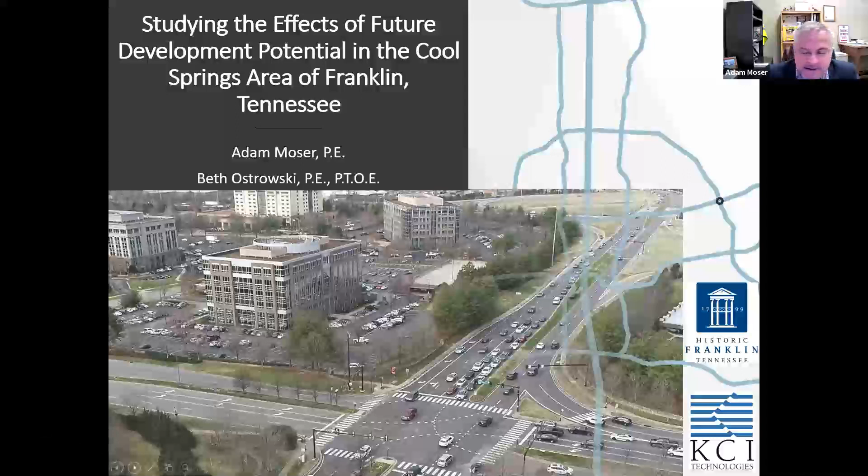So a little bit about Franklin for maybe some of the DSITE people that are on that maybe have never visited us. We are the 10th oldest city in Tennessee. We're actually older than Nashville, and even though people think we're a suburb of Nashville, we like to kind of think it's the other way around because we were here before they were. But no, we like to keep our small size. It's actually a constant citizen resident request. You know, we're growing too fast, we're doing this, that. So our board does hear that quite a bit.

But at any rate, as you can see, our population has kind of exploded in the last 10 years. Lots of new retail office space, jobs have increased, obviously, with all the new development that we have. And in particular, the Cool Springs area, which this study is about, that's kind of our main business or commerce area that most of the people are working at or going to, at least in Franklin. So next slide.

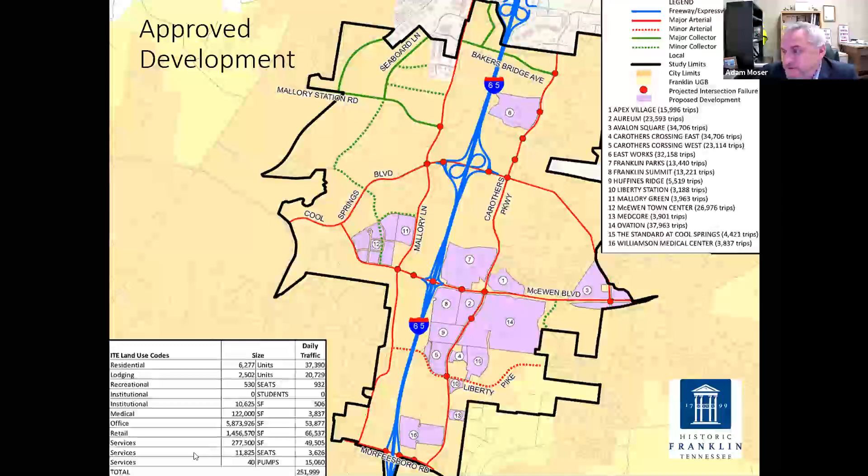So that's the reason why we decided, hey, let's go ahead and study this. Let's see what we need to do. Maybe there's some policy decisions. Maybe there's some infrastructure decisions to be made, and whatnot. So the next slide, I'm going to hand this off to Beth, and she's going to talk about the meat of the study and what they did, and I'll come back in the end and give you a wrap up of what the board said and what we've implemented and what we're going to implement. So go ahead, Beth.

Thanks, Adam. So we jumped into this study tasked with inventorying and analyzing existing conditions, evaluating the impacts to the transportation network based on multiple future scenarios, and recommending improvements to operations, infrastructure, and policy. The study area, Adam's kind of gone over this, but with 64 intersections, I like this graphic that just identifies our major roadways pretty clearly. Next slide, please.

So we began with data collection in January of 2020. Luckily, we had everything done before COVID hit, so we lucked up there. One highlight related to data collection was the drone footage, which we used to validate our peak hour observations and model. With the quantity of intersections and this being a very large study area, the drone footage proved very valuable as we refined our existing model. And these are all stills from that drone footage.

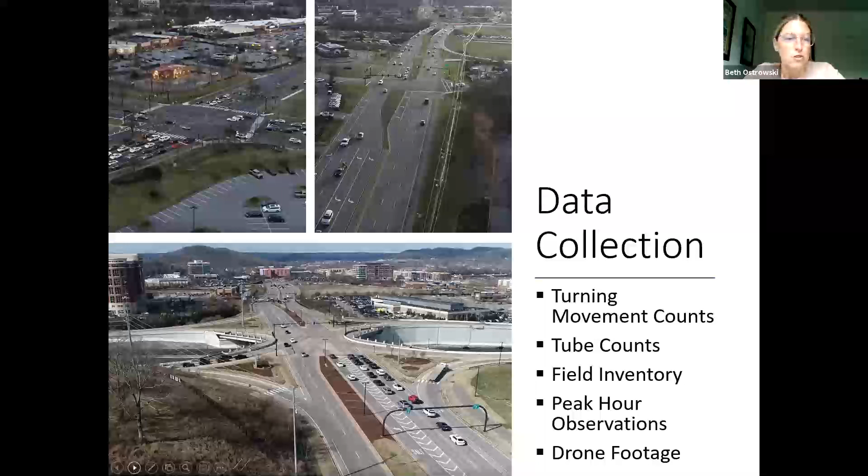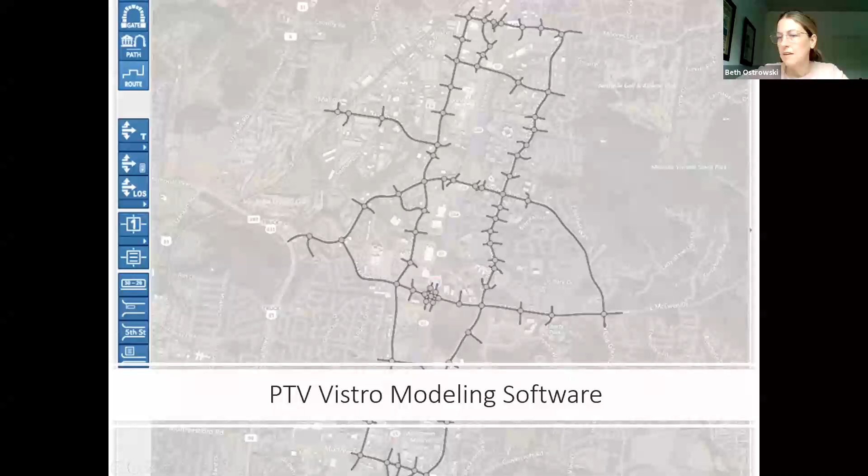Next slide, please. So we had recommended to the city using PTV Vistro instead of Synchro, which I think is what most people might expect. And before I jump into the why, let's use Menti to conduct another quick survey. Luke, if you go to the next slide and pull up that Menti question. So are you familiar with PTV Vistro? Do you use it? Choices: yes, often; yes, occasionally; heard of it but haven't used it; and not familiar. And I'm gonna go ahead and answer as well.

We'll give it just a second, but good information on what I need to tell y'all on this next slide. Luke, I think that's probably a good subset there.

So PTV Vistro does look a lot like Synchro. It feels a lot like Synchro, particularly the latest iterations of Synchro, where you can have multiple scenarios in one file and where you can do your distribution via paths. In my opinion, it's a superior product to Synchro for this particular type of study, and I'll give you just a couple identifiers there. One, in terms of the quantifiable results, we much prefer the HCM6 analysis in PTV Vistro

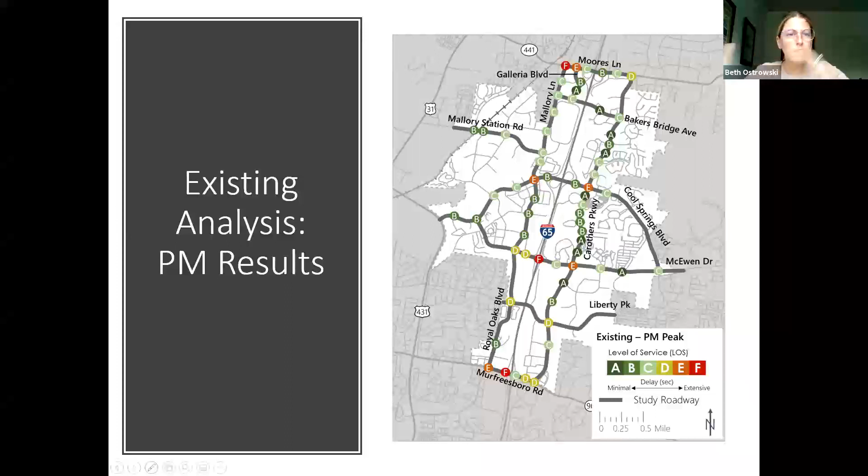Next slide, please. We looked at two categories of future scenarios. The first category was approved development, which we considered at 50% and 100% build out. And then we had maximized development scenarios. Ultimately, we analyzed these 3 times at 25%, 50%, and 100%. More on that and the maximized development just in a little bit here.

Next slide. So we began with background growth, which we considered by corridor, not system-wide. Growth rates, just for information, landed between 1% and 2% for all corridors, so 1, 1.5, or 2%. We used 3 different methods to validate our background growth. First, we compared historic turning movement count data. The city had an abundant collection of historic turning movement counts that we could analyze and look at year-over-year growth.

Second, we pulled TDOT's AADT tube data and did that comparison that I think every traffic engineer across the state of Tennessee uses. And third, we used StreetLight to pull historic volumes via mobile device tracking. I probably should have had another Menti question about StreetLight, but if we have questions about that in Q&A, I can answer those. I'm sure StreetLight has pitched to most people on this call at this point.

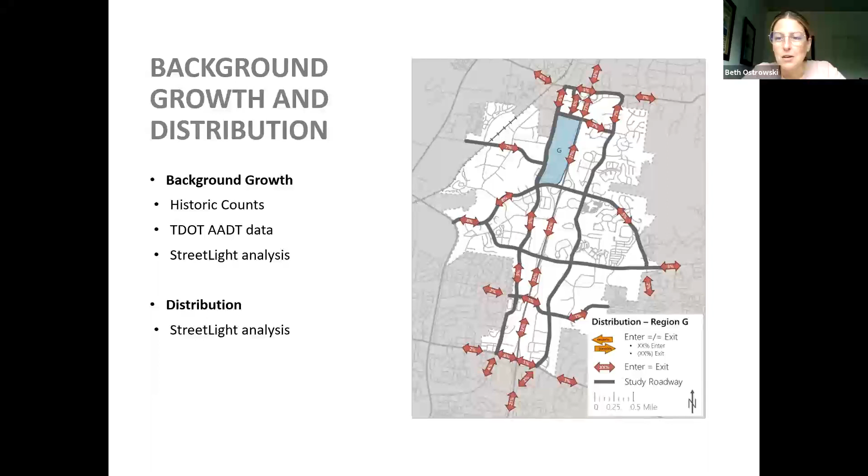We also use StreetLight to determine distribution for regions that we created across the study area. These regions and distribution were used to extend approved traffic impact study distributions outside their individual study areas. And we also used this, what I'll call macro distribution, in the maximized development scenario, which I'll describe shortly.

Next slide. So Adam touched on this a bit earlier, but we had 16 approved developments and their associated recommendations added to our model. As I mentioned, we modeled each of these developments in Vistro and extended the distribution paths beyond their own study limits to our study limits. So let's look at the results for the approved developments.

Next slide. At 50% build of the 16 approved developments, and these are grown to 2030, operations generally still look pretty acceptable. 31% of intersections are anticipated to operate at unacceptable levels of service, according to City of Franklin standards in the PM peak.

This is an opportunity to explain why I am an advocate for this type of study. When conducting a basic traffic impact study, we may include a few background developments, particularly ones that are really in the project vicinity. But there are likely, especially in a high growth area, other future developments outside the immediate project vicinity. I believe the best way to track these developments and the actual needs of the transportation network is via what I describe as a living model.

So I'll step off my soapbox for a second here on this one, but you'll see on the next slide kind of the importance of understanding the bigger picture. You can go to that next slide. Oh, we're there. Thank you.

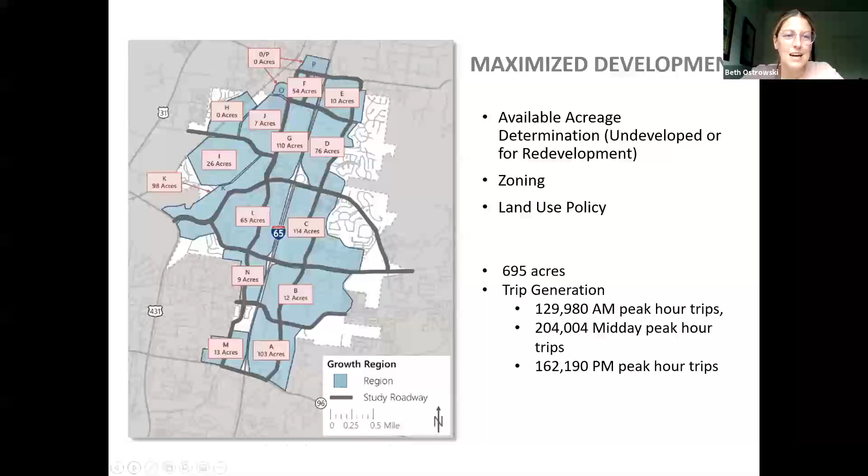So we wanted to anonymize this data rather than call out specific parcels. We didn't want a report that said, hey, everybody go buy this land. So we utilized the regions that I discussed earlier, and this allowed us also to distribute trips from each of these regions throughout the network. We looked at zoning and land use policy to determine, for example, an allowable building height within each region, and anticipated uses per the land use policy for each region. This allowed us to complete a trip generation and eventually assign trips to each of these regions.

So let's click ahead to the results here, Luke. At 25% of the maximized development scenario, we are failing in most places during all times of day. And I think it's worth noting here that we haven't incorporated any improvements yet. So this is just with the existing road network and already programmed infrastructure improvements. And then the next one, 50% looks probably just like everyone predicted based on the numbers we had looked at. And let's click ahead to the next one.

So at 100%, I described our model as broken. Do not get me wrong here, PTV Vistro worked, but the delays and the queues were so monstrous that the results were really laughable and not worth reporting. We actually went back and added the 25% scenario after the fact when we realized this 100% scenario looked so similar to the 50%, just a worse version of it, because we wanted to have two scenarios that produced varying results that were worth reporting.

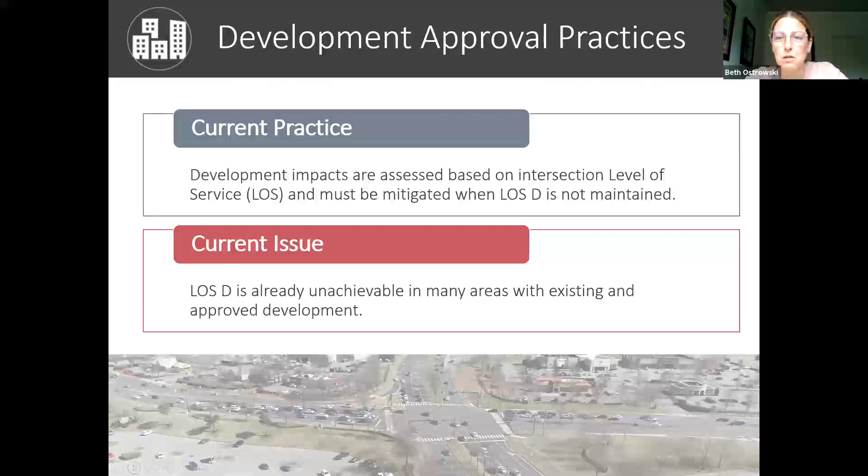We partnered with the city really closely to develop these recommendations and made a lot of refinements just to make sure that we were proposing something the city was comfortable with and really could move forward. Next slide, please. So jumping right into development approval practices, the city currently assesses the impact of developments using intersection level of service, and those impacts must be mitigated when level of service D is not maintained. However, we know there are many locations where level of service D is already unachievable. The photo at the bottom of this slide is one example where this occurs at the intersection of Cool Springs Boulevard and Mallory Lane. Next slide.

When we look at this intersection, and this is Vistro here, we see that it would take 11 extra lanes identified in red on the right to get this intersection to a level of service D. These improvements are likely physically and fiscally infeasible. So what's the answer? Next slide. Actually, let me say one more thing on that previous slide. That was if you look at this comparison, and just because I know I'm basically not giving you any infrastructure recommendations.

This is what a lot of the intersections look like. Basically any point where a couple arterials were crossing, this or more is the level of improvement needed. So this isn't a one-off situation. Every intersection basically needed at least a lane or two, and many needed 5 or 10 or more additional lanes in order to get to level of service D.

All right, you can skip ahead. Thanks, Luke.

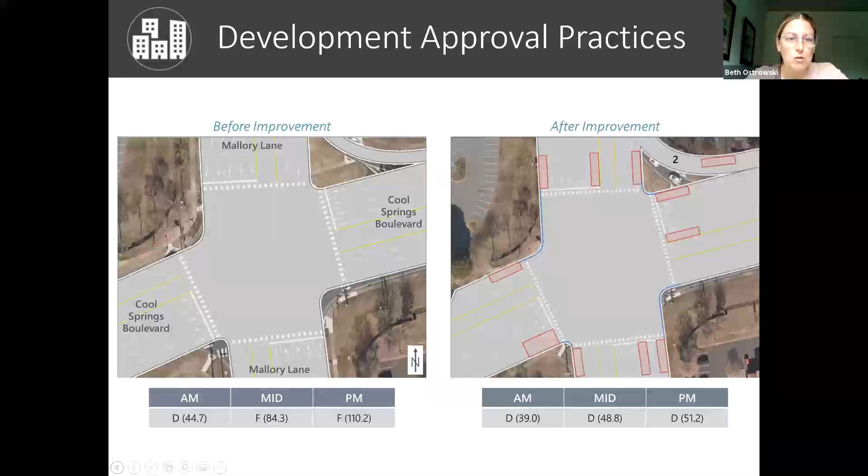So we proposed that a target level of service still be maintained in the city's street standards, knowing that level of service D isn't always achievable, and simply mitigating impacts with traditional infrastructure improvements as best as you can. So the city is already moving forward with this recommendation, moving instead to level of service E as a threshold, which I think is a great first step. In addition, we recommended the city begin using alternative metrics such as VMT, vehicle miles traveled, to look at impacts and applicable solutions more broadly.

So let's look at an example of that really quickly. Let's say the city has a new large mixed-use development coming to Cool Springs. It'd be a great addition to the local economy, but all of the surrounding intersections are failing with existing level of service. We know the development will increase the number of vehicles on the road and make level of service, delay, and queues worse, but there's no feasible infrastructure improvement that would fix it. We can't pave our way out of the problem.

So the question becomes, how do we make sure impacts are mitigated as much as possible? In situations like this, we advocated that the city look at the vehicle miles traveled of the development, or VMT, which takes into account the surrounding land use, multimodal facilities, and trip characteristics. Typically we think about how many trips are generated by a development, but what if we knew that this site would have a regional employment draw, necessitating long commute lengths from common destinations? It may change our feelings a little bit.

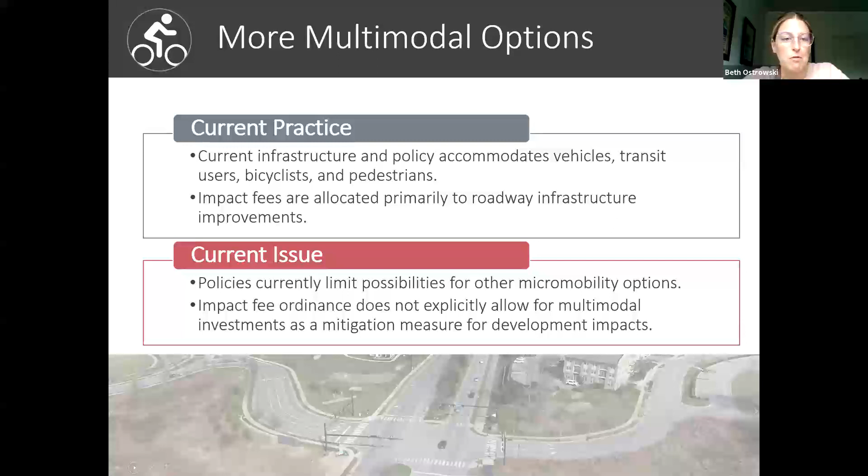We recommended a few things in this area. First, there is real potential for micromobility options to succeed in Cool Springs and fill a niche mobility need, so we recommended the city use a pilot project to test this. Adam will talk in a minute about the board's temperature on that, but it was one of our recommendations. We also recommended the city reevaluate its roadway cross section to safely and efficiently accommodate various forms of travel, and explore the need for additional multimodal fees.

Ultimately, our recommendations included an implementation timeframe for policy recommendations, with tandem infrastructure recommendations. We viewed these as a buffet. While we hope the city will take everything from the buffet and implement many of them, we recognize there may be a few things that aren't their option of choice, and they don't need every strategy or everything on the buffet to be successful—but they do need to take some things off the buffet to move the city into the future successfully.

With that, Adam, I'll turn it back to you to bring it home.

As you can imagine, the study lasted pretty much through COVID. We started before COVID and had four presentations to the board from March, April through November of 2020, going through what Beth just covered step by step. In the end, when you're not in front of the board in person—remote Zoom meetings—sometimes you don't get quite as much feedback, so that may have helped or hindered our progress.

Roundabout evolution in the US started with single lane roundabouts, which were very successful. We know not everybody likes them, but after implementing, they're always successful. These are very nice to use in urban areas, rural areas, near schools, or wherever. Lots of communities have already embraced single lane roundabouts, and you can see them popping up everywhere, sometimes with bypasses.

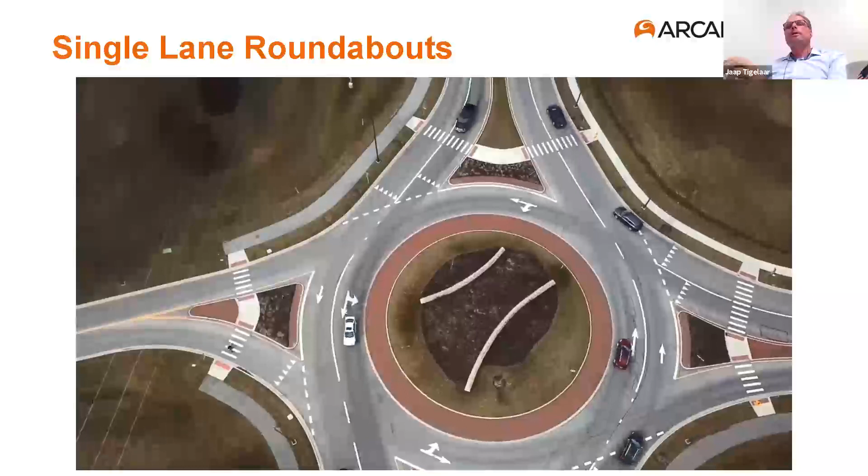Once we got comfortable with single lane roundabouts, we blew them up and did multi-lane roundabouts. These first started with multiple lanes on the main road and single lanes on the side roads, then grew into multi-lanes with all directions, 2x2s and even 3x3s sometimes.

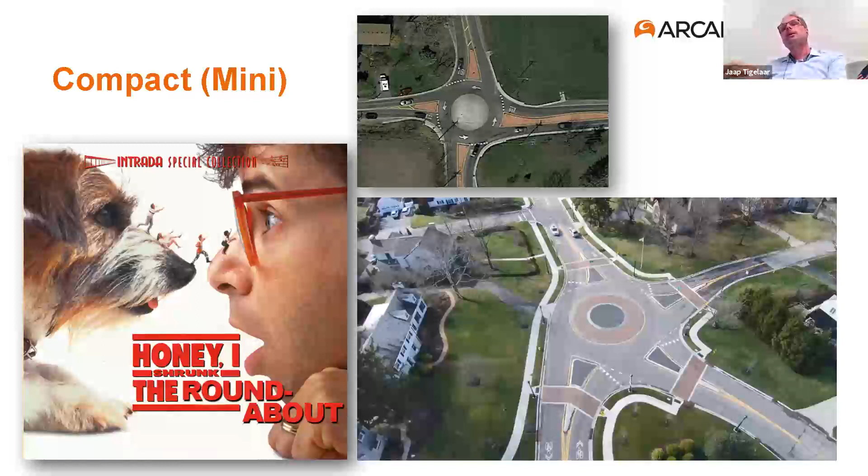After we blew them up, we decided to shrink them as well, and now we have the comfort of mini roundabouts, the smaller ones. This is much smaller than single lane roundabouts, about 90 feet in diameter. Many use this on low speed approaches, and several communities are also starting to use them successfully on higher speed approaches.

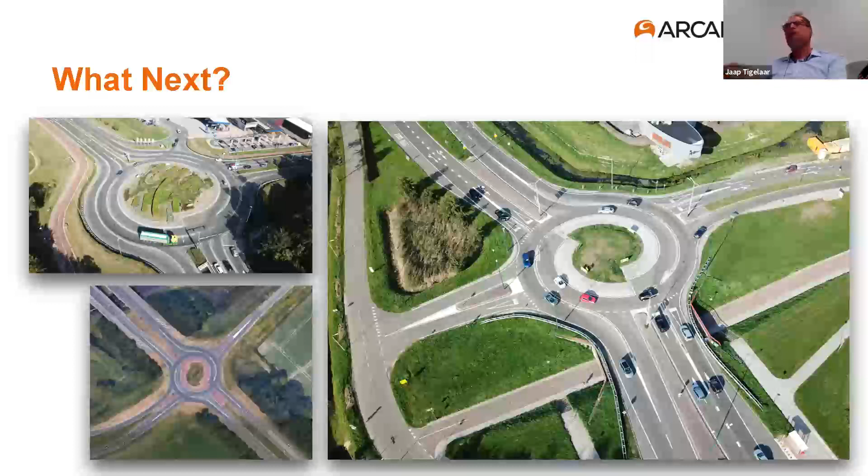But the question is, what is next? So we think the turbo roundabout could be the new tool in the toolbox for multi-lane roundabouts. In this presentation, I will provide background information and history, and look into how we can implement them in the US. A typical copy-paste from the Netherlands, using images like these in the US, might not be the best solution, so we need to adjust them a little bit.

So why turbo roundabouts in general? This is an important question, because if we cannot answer it, nobody will accept it. In the Netherlands, we introduced single lane roundabouts already in the 80s, so we've experienced 30 or 40 years of single lane roundabouts. They were really successful, but when traffic volumes increased, very similar to the US, in the early 90s multi-lane roundabouts became popular in the Netherlands.

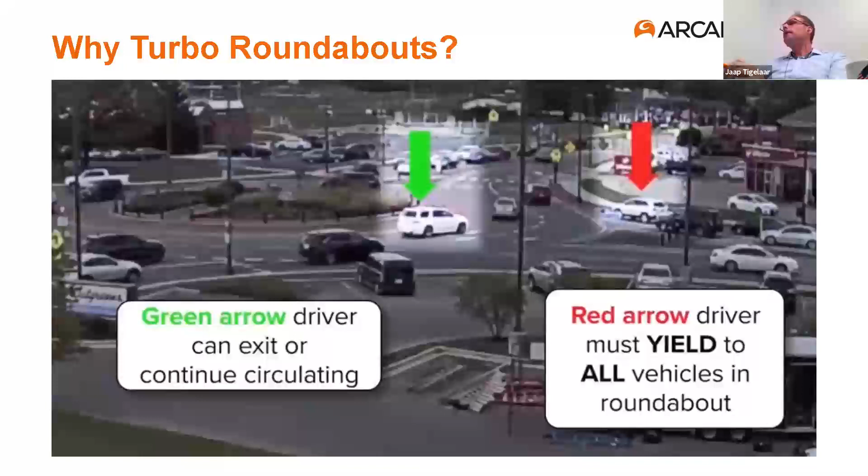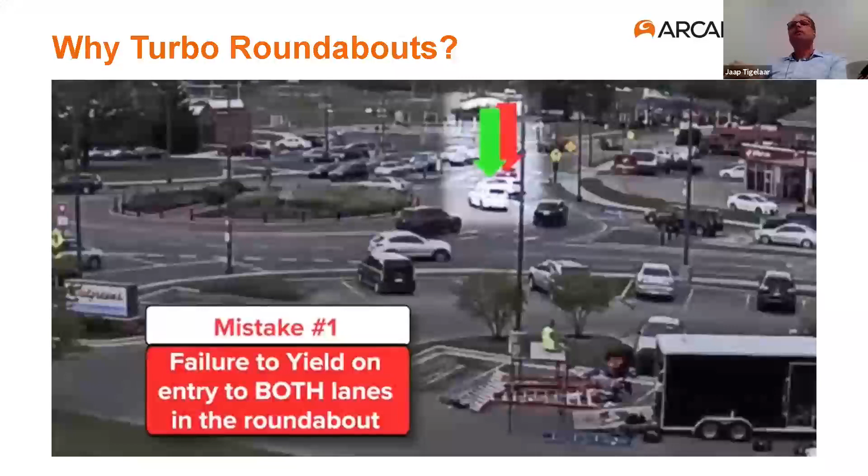This is also shown in this movie. Here's a good video from the city of Hilliard in Columbus, Ohio, that shows the potential problems with 2x2 roundabouts. The green arrow driver on the left is approaching the double lane roundabout, and this is the first problem that sometimes happens: the red car failed to yield for both lanes in the roundabout. As the movie continues, those two cars end up side by side, creating a crash when the green car wants to exit the roundabout, because the red car didn't yield.

The red car was on the outside lane wanting to make a left turn, and used the outside lane instead of the inside lane. So these are two mistakes often made on multi-lane roundabouts that a turbo roundabout can solve.

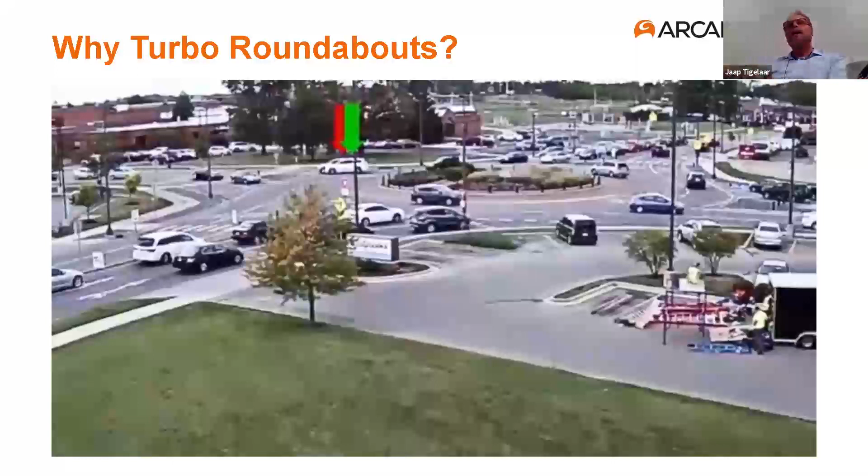So what kind of design challenges have we experienced in the Netherlands? Basically, what we wanted to do with the turbo design was create a layout that eliminates those safety conflicts we saw in the movie, while still increasing capacity. This resulted in a spiral-shaped roundabout, the turbo roundabout, without lane changing on the roundabout itself.

So why the name turbo roundabout? Well, it's not because you can have high speeds on it, since we normally design them for speeds like 20 to 25 miles per hour. It refers instead to the improved traffic flow compared to a standard multi-lane roundabout.

So what is a turbo roundabout, and how is it different from the roundabouts we normally design in the US? There are four main concepts in the turbo roundabout. First, there are no lane changes within the turbo roundabout itself, which eliminates the conflicts we showed in the movie earlier.

This is accomplished by a small raised curb between the lanes. I'll show you some examples later in the presentation. With this curb in place, drivers are forced to make all lane choices upstream of the roundabout before entering. Another very unique feature is the spiral geometry. Think of the turbo roundabout as two semicircles that are slightly offset, which naturally spirals the inside lanes to the outside lanes of the roundabout. We'll cover that detail a bit later.

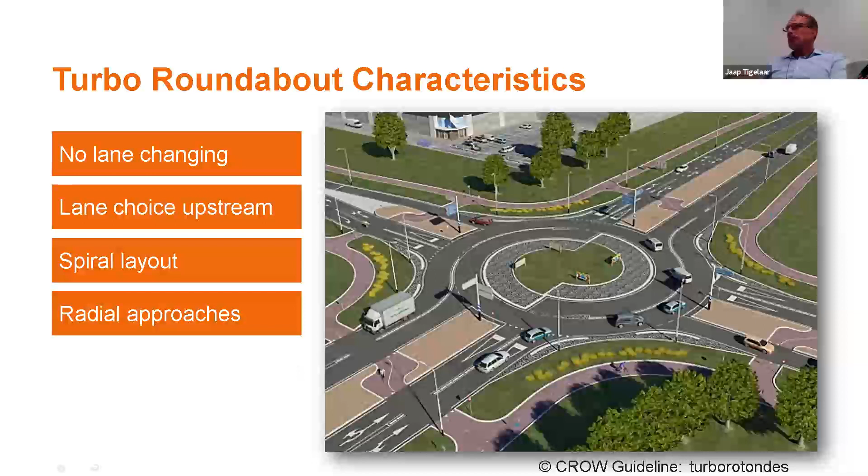A big answer on the question why turbo roundabout is traffic safety. The safety benefit can be explained by the number of conflict points at the roundabout itself. A conventional 2-lane roundabout has 16 conflict points, as shown in the image. That is 12 actual conflict points, 2 weaving points, and 2 cutting points.

The turbo roundabout only has 10 points. And now the weaving points and the cutting conflicts are not there anymore. So 16 versus 10, that is a reduction of 37.5%. That is the theoretical approach, but the safety benefit is also proven in an evaluation study done by a student at the Windesheim University in the Netherlands in 2016.

Christiaan Vos looked at the crashes at intersections 3 years before and 3 years after that intersection was transformed to a turbo roundabout. This evaluation resulted. This evaluated locations where a multi-lane roundabout was transformed. We looked at the injury crashes 3 years before and 3 years after.

And you can see in the table that compared the unsignalized and the signalized intersections to the turbo, and it showed the similar advantage for a turbo roundabout compared to what you would expect for introducing a roundabout at an unsignalized or signalized intersection.

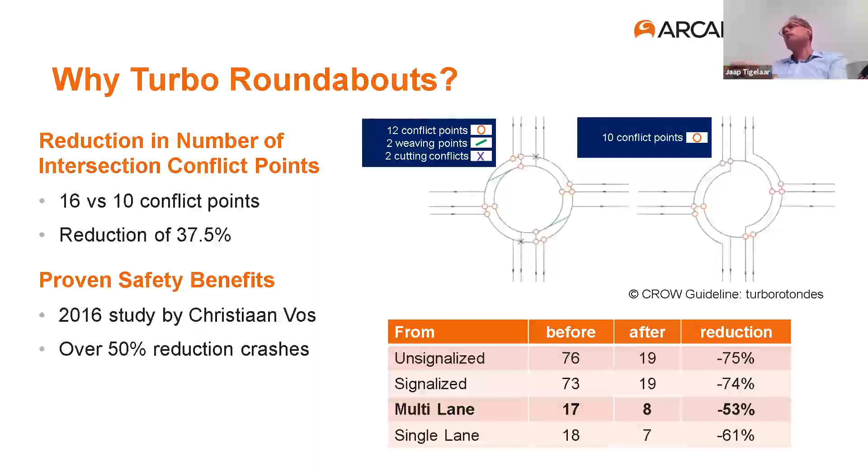But this is a reduction because we normally had a capacity issue at single lane locations. That's why we transformed them to multi-lane turbo roundabouts, and you could still see a reduction in crashes. That's the answer on why the turbo roundabout.

Nowadays we have over 385 turbo roundabouts already in the Netherlands, and over 250 roundabouts outside the Netherlands, mostly Eastern Europe, and at this moment not really turbo roundabouts in the US, but hopefully that will change.

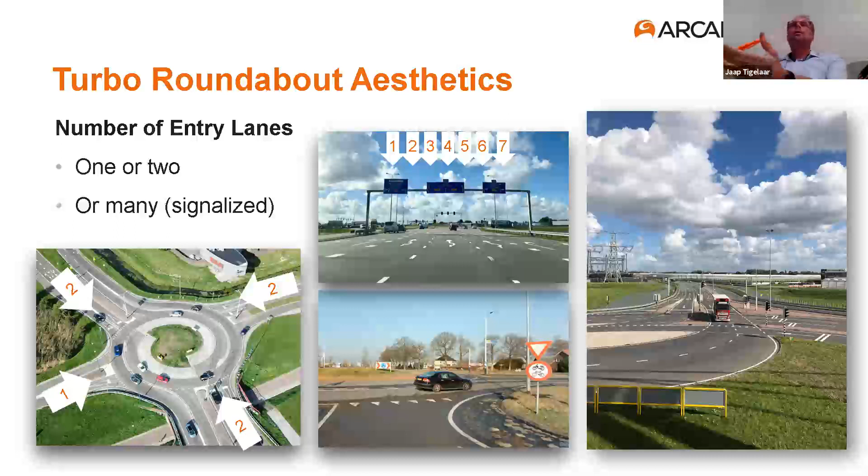We will show them later, but those are a little bit more difficult to design and maybe not the best way to start. The one you see on the left is a normal shaped turbo roundabout with 1 or 2 entry lanes. On the exit lanes, you can also vary in number of lanes. On the left side, you see a roundabout with 2 exit lanes on all exits. On the right side, you see a main road with 2 exit lanes and a side road with just single exit lanes.

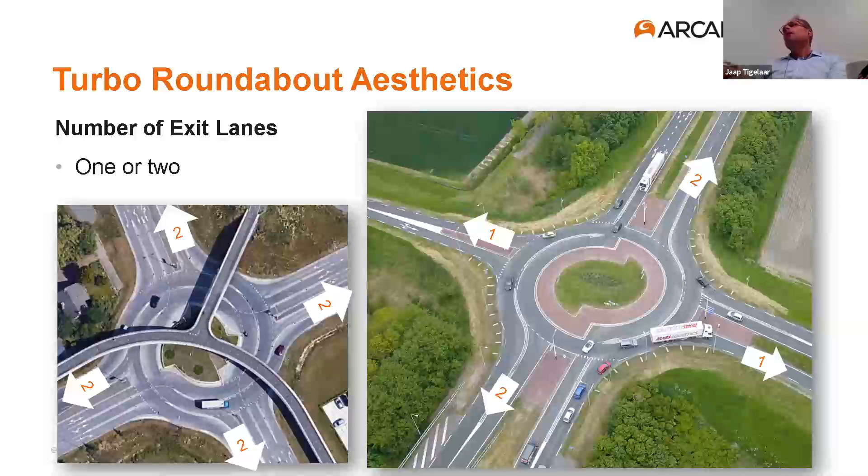When you approach the roundabout, you just have to yield, you jump into the inside lane, and you will be guided through the roundabout to your exit. You blink on your exit and you're guided to the exit without any conflict at the roundabout itself. It's easy. When you're used to it, you can drive every turbo roundabout. So that was the first sneak preview of the turbo roundabout.

Let's dig into some more design elements. All design elements and criteria are incorporated in the Dutch national guidelines for turbo roundabouts. That's the CROW publication 257, based on Fortuijn's design principles. It's all written down in this document, but of course this is in Dutch, so not really easy to read over here. So I will just show some of the images and design elements explained in that document.

As mentioned, the spiral geometry is a key element of the turbo roundabout. Fortuijn created a smooth spiraled vehicle path by shifting the centers of a 2-lane roundabout by just a lane. The inside lane then aligns to the outside lane, and by rotating the whole, the approaches can connect at a right radial angle.

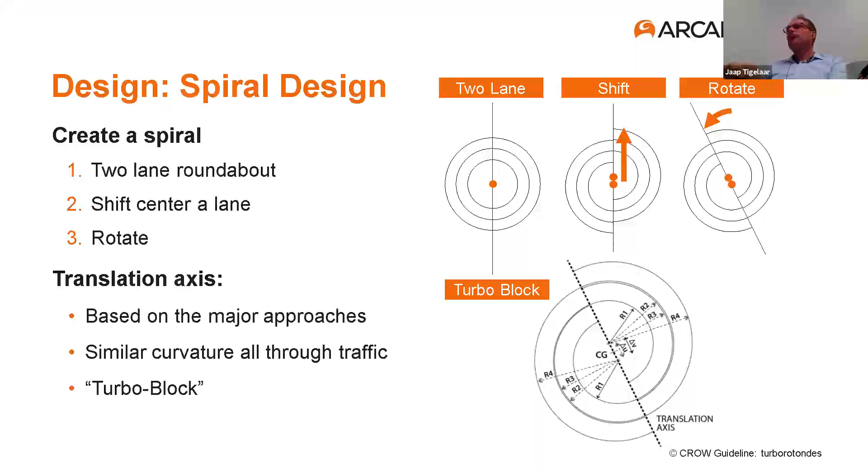This idea looks easy, but for the actual design, the translation axis should be aligned perfectly to the major approaches to create a similar curvature for all through traffic at the roundabout. This basic shape is called the turbo block, and later in the presentation, I also have a turbo block for a US design. We will look into that later.

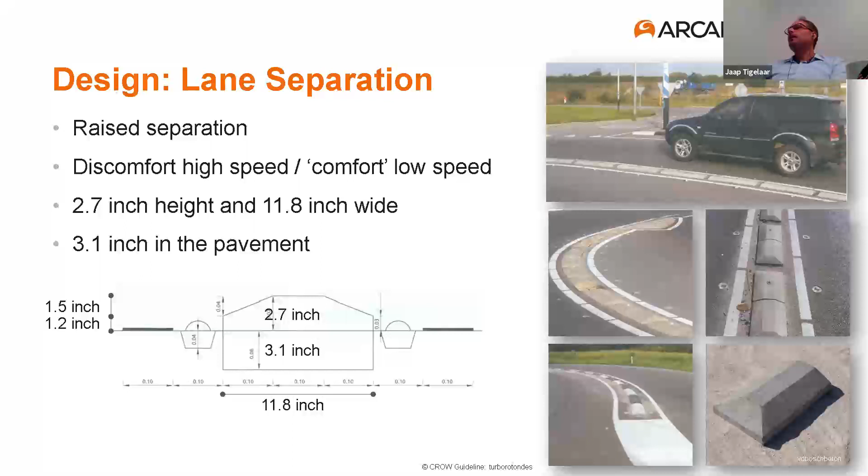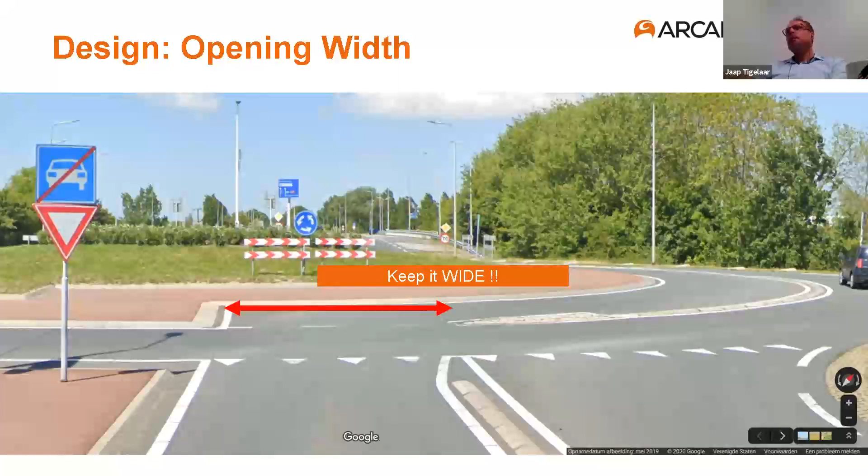Another important feature for the turbo roundabout is the opening width. That's the location where the lane separation starts, and it is crucial in a good roundabout design. The opening width should suit the situation well. We want to keep the opening width as wide as possible, so most vehicles don't negotiate the curb and can comfortably enter the inside lane, from the inside lane to the inside lane.

But we want to keep it as narrow as possible so that it only accommodates the recommended move from the inside lane. So we don't want to invite vehicles from the outside lane to jump into the inside circulatory lane. So that is a bit of a struggle. Keep it as wide as possible, but also keep it as narrow as possible. And that's when we decided to design a special feature we call the droplet, and sometimes it's also called the frog.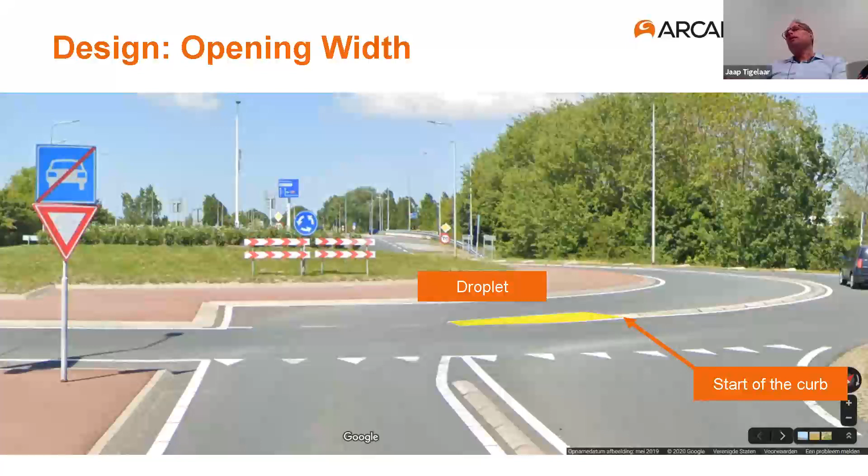This area is to extend the start of the mountable curb, the inside curb. When you are in the outside lane, you don't want to cross it. So you are guided to the outer circulatory lane. But the swept path of larger and oversized trucks from the outside lane can easily enter the inner lane by overriding the droplet. And this is how it looks in more detail.

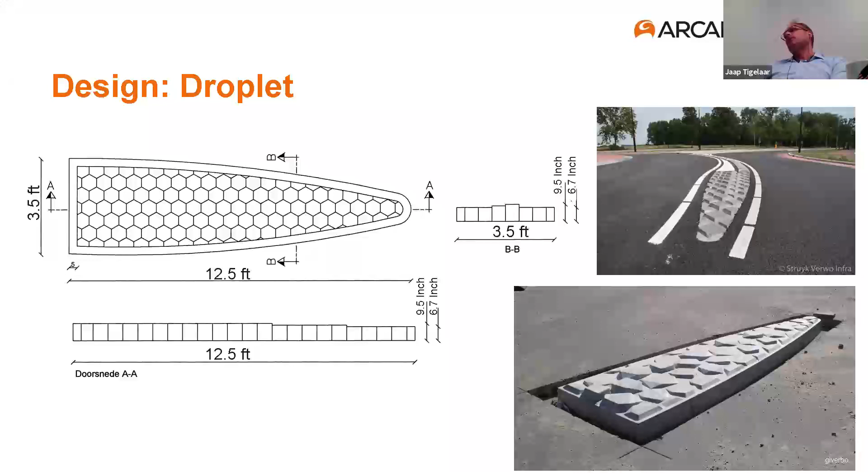It's just a little bit lower than the elevated raised lane separation, but it's much wider to make people more aware of it. It calls the attention to the lane divider and prevents circulatory traffic from changing the lanes. We designed the droplet as prefab concrete segments that we sank into the pavement, so it's easy to develop and to build.

On the roundabout itself, technically it's not necessary to have arrows on the pavement, because when you are in your lane, you cannot change lanes anymore, you can only exit. But some road authorities are just adding additional pavement markings on the roundabout itself just to accent the movements. And at the exit, we put destination signs to show which direction you can get if you exit the roundabout at that location.

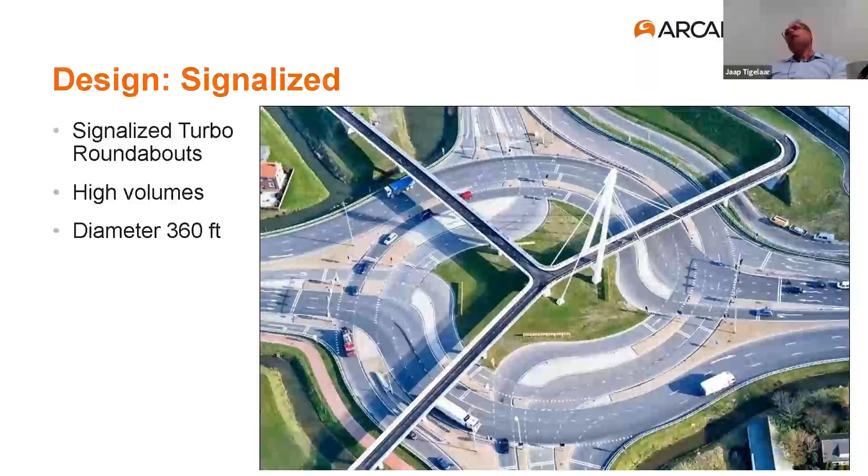At locations with really high traffic volumes, we introduce the signalized turbo roundabouts. These have the same basic turbo features, so it's spiraled, it has a radial approach, you cannot change lanes at the roundabout, so you have to make your lane decision upstream, and no switching between directions at the roundabout. Note, these are really bigger. These are specific for high volume intersections, with a diameter of about 360 feet and way bigger than the normal turbo roundabouts, but can also have high volumes. And volume-wise, we dig into that later.

As said, at high volume intersections, we also produce nice bicycle bridges, but that's something maybe a step too far for the US at this moment.

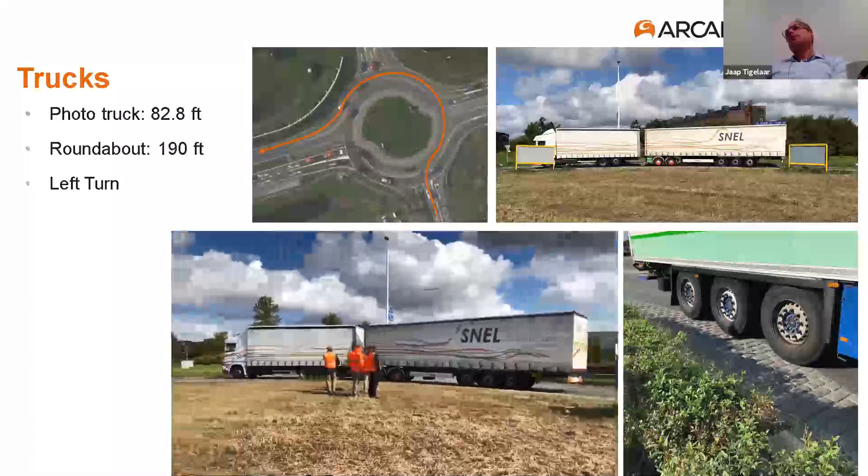For trucks, it's also important that they can make the turns. On this video, you can see a truck of about 82.8 feet. A big truck. It's taking the roundabout that has a diameter of about 190 feet, and it's making a left turn. And as you can see, it's using the roundabout without touching any of the raised elements or the truck aprons.

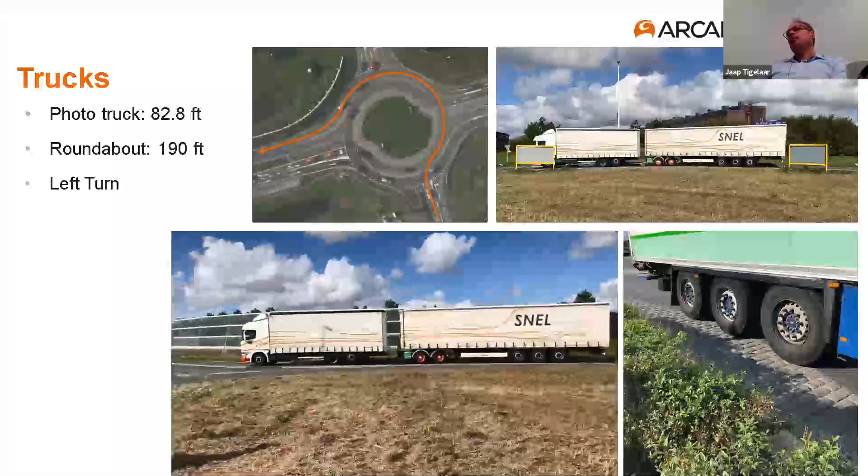So it's perfectly doable for also really large trucks. Of course, this is a little bit of a different design than the WB67 trucks we have, but we can also accommodate those trucks on these kind of turbo roundabouts.

Often we hear also questions about the motorcycles, where the elevated lane separations are forgivable for cars. This is not the case for motorcycles. They don't want to hit them. Although these disadvantages, we still get the positive response back from the motorcyclists, because the smaller chance that drivers unexpectedly make a lane change at the roundabout is received very positively. And this benefit outweighs the risk of hitting the elevated lane separations.

And of course, we need to make the roundabouts as safe as possible. So we put warning signs upstream. We repeat the warning signs at center islands. We don't make the raised elements too high, and we use contrasting colors.

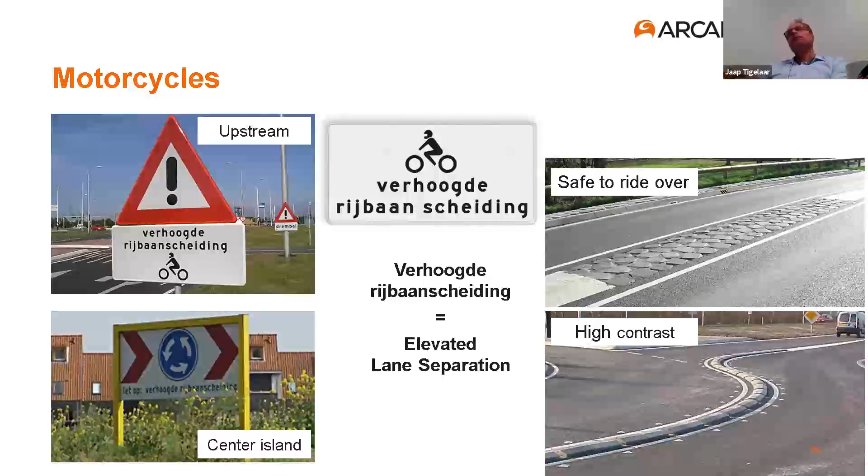And this is what it looks like. We have the signs upstream. We have the signs in the center island. And we don't make the lane separations too high, and you can see with using high contrast colors, it's easy to see, and even with the reflectors, you can see them even in the dark pretty well.

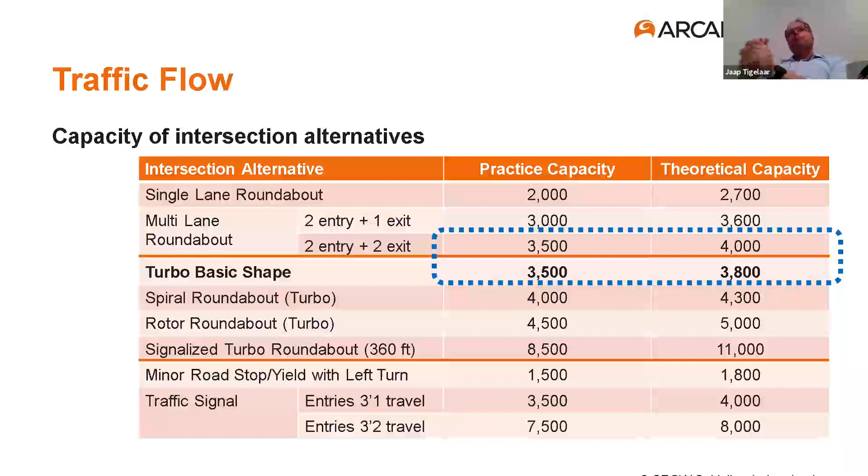Traffic flow wise, I will speed up a little bit because we don't have that much time left. The capacity of intersection alternatives is shown in this table. In the table that I have accented is a comparison between a multi-lane roundabout with 2 entries and 2 exits compared to the basic shape turbo roundabout. And as you can see, the theoretical capacity is similar, and the capacity in practice is actually similar. It's about 3,500 vehicles. So the turbo roundabout has a similar capacity as the basic shaped 2x2 roundabout.

So when the traffic on the main road is increasing, it's still more possible to enter the roundabout at the turbo roundabout compared to the multi-lane roundabout, and that can be explained by a better lane utilization. Traffic entering the roundabout is less hesitant, and we think also the radial approach helps. So the turbo roundabout is suitable for locations with high main volume where you still need to have volume at the side roads.

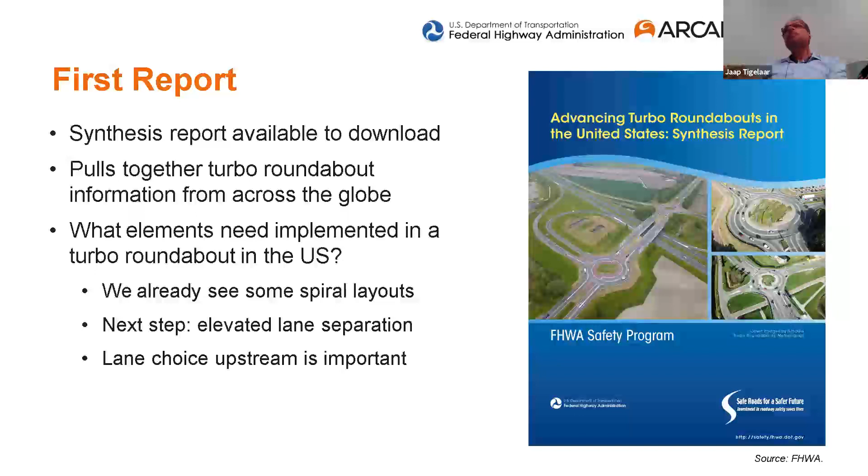And if we look into the elements that need to be adjusted when we implement it in the US, well, we already have some spiral layouts in the US. That's something we're already used to. The next step would be adding the lane separation and using the lane choice upstream is important. For GDOT, we help by updating their roundabout design guide. And together with GDOT, we designed some turbo roundabout features and implemented them in our double lane or multi-lane roundabouts.

And this is an image showing how to design the spiral design used in the turbo roundabouts suitable for WB67 trucks. This is a turbo block case 3, so for WB67 side by side. How we designed this is we used the WB67 swept paths, 2 trucks next to each other, side by side. And when you do the same trick as we showed earlier, you take the 2 circles, you shift them a lane and rotate them, you get the turbo block.

But technically, that turbo block is not finished, because when you use these WB67 trucks, you will get a lane width of about 21 feet. And that's way too much for normal cars. They can fly over the roundabout with high speeds. So we need to do something for that. And the solution for that is the raised elements. A trailer can override those raised elements, but a normal car will not do that.

And the raised elements we designed based on a similar approach. We used the WB67 swept path circles, but we added the swept path of a bus or a WB40 inside. When you align those on the outside of the 2 lanes, you can see there is a difference between the swept paths. And that difference can be filled with a raised element of about 6 to 7 feet. And when you do that, the result will be a lane width of about 14 feet. And that's perfectly suitable for normal cars.

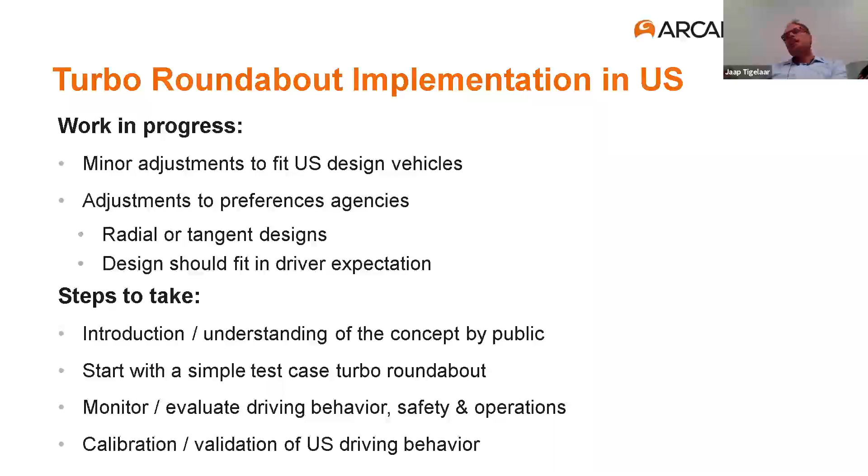I hope that we will build the multi-lane roundabouts in a turbo roundabout shape in the next few years. I think many will pop up in the near future, at least in design and planning stages, and hopefully also be created at least next year. If so, then at least my work is done. And I hope that with these kinds of presentations, people will understand what a turbo roundabout is, and that acceptance will be improved. This is what I wanted to share with you.

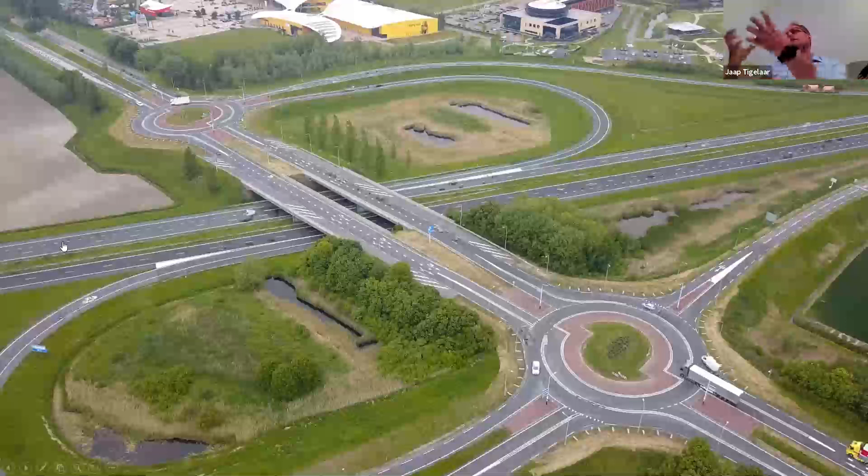It also accentuates the difference in speed limits, so once you pass the roundabout, it's clear that a different speed limit applies.

We had a question from the audience - I think you may have touched on this one already. It asks, what's the largest inscribed diameter for a turbo roundabout?

You get several different diameters, but diameter-wise we want to keep it as small as possible, because the smaller you have them, the lower the speeds. You also have to design them well for your design vehicle. The basic shape turbo roundabout, as we design in the Netherlands, is 165 feet in diameter. But at locations with high truck volumes, we grow them to over 200 feet to provide more guidance for those larger trucks. The really big ones, with 7 entry lanes and traffic signals, grow over 300 feet, but those are just large turbo roundabouts. The basic shape you see in this movie is 165 feet in diameter.

Peter Kaufman had a question that says, does it matter around which point you revolve the turbo roundabout block?

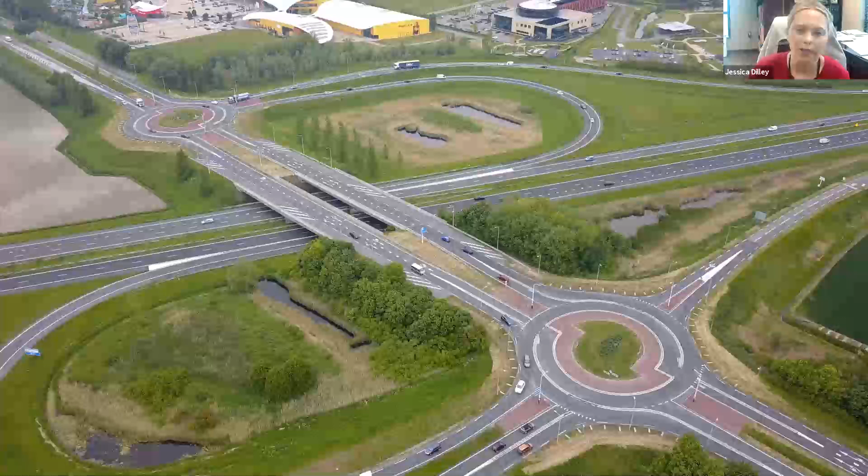I don't understand the question well - how you rotate the turbo block, or? I think that's what he's asking. I guess we'll give Peter a chance to respond back. I think Stephen had a question too, maybe a couple slides back, about an image where the turbo roundabout was - this one, maybe. This may be what he's referring to.

Yeah, so it's probably the question of how far you want to shift or rotate the circles to align them. Basically that is specific for every location, because you want to align the approaches at the right angle, so that the entering traffic has a clear trajectory.

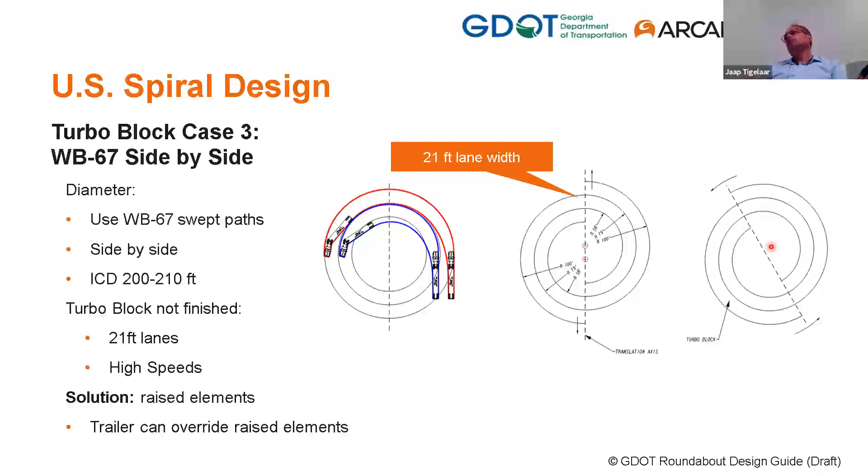I'm not sure if I can show pointer options, laser point - maybe. So if you have your entry lane here, your main road here, and your side road here, with your center points here, you want the distance between them balanced - you rotate it as far as necessary to have a similar distance from the center to this lane as from the center to that lane. There's a trick to how far you need to rotate it, but I don't have it in my slides.

No, it's not in my presentation, I had it before. Sorry - next time we'll put it in.

Stephen had a question: how many truckers complain about narrow lanes, or does that happen a lot? No, we don't have them. We designed the roundabout so that your cabin always stays inside the lane, and those raised elements are easy to overtrack by your trailer if necessary. At locations with high truck volumes, you need a well-designed turbo roundabout with a nice diameter so they can just use the normal road. As you saw in that image earlier, that location with a distribution center has high truck volumes, so those lanes are a little bit wider. We don't get a lot of complaints about trucks that cannot use them well. It needs to be said our trucks are a little smaller than WB67 trucks—our design vehicle is more similar to a 62, or between a 62 and a 67. But as long as you design your roundabout well, so the cabin can stay on the pavement without using any raised element or truck apron, I think no trucker will complain.

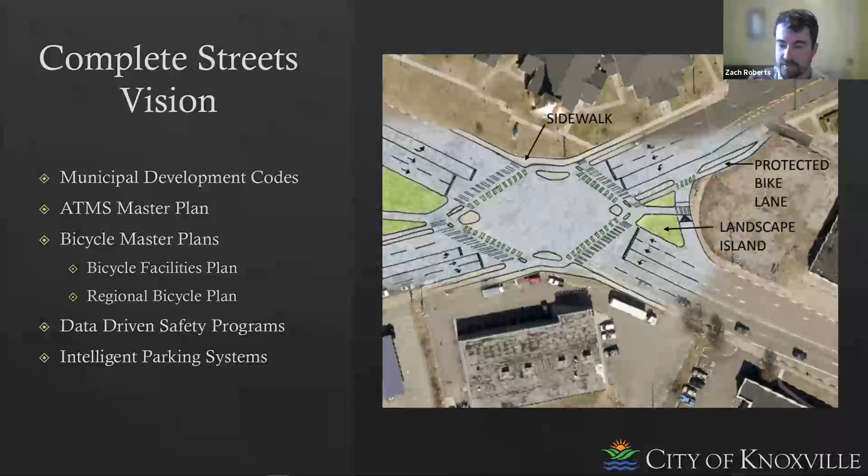Every effort is being made to develop data-driven safety programs rather than being reactive in addressing safety. Our parking systems are also being modernized, as that's an important element of trips to downtown and other destinations.

Our partnerships with other departments and agencies are crucial to the success of this vision. We have partnerships with our electrical utility providers, and they recognize the city as a priority. They give us some dedicated space on their poles, which reduces conflict with existing pole users and reduces the utility make-ready burden on all of these projects.

Fiber sharing improves reliability by providing redundancy and resiliency to both city and TDOT networks. It provides redundancy as a backup route during communications outages, and resiliency provides the potential for multiple data paths, multiple transmission paths, so that routing can be optimized based on the most efficient path.

We're able to test ITS technologies in our network in real-world situations with advanced user detection and other emerging technologies. We want to be a proving ground, but not necessarily a test bed. We're happy to be able to help test newer and less established technologies, but we always want to have constraints in place to make sure that we're not creating dangerous situations on our network.

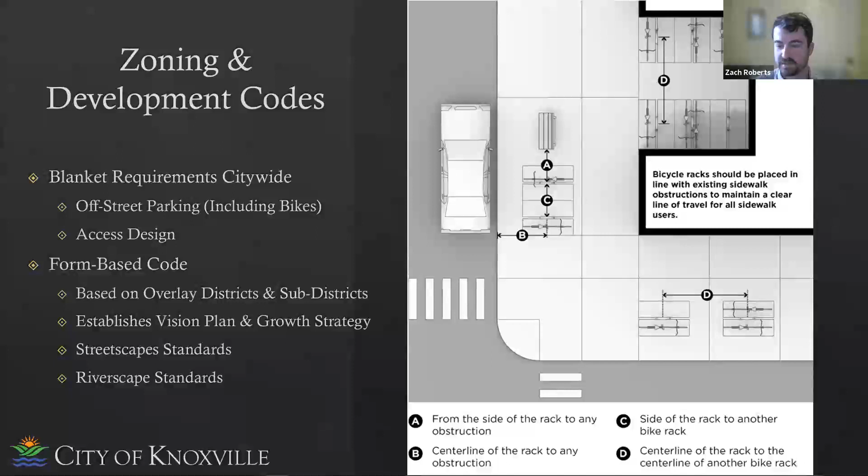And each form-based code district is subdivided, and each sub-district has its own vision plan and its own growth strategy with specifics on density, types of structures, and a bunch of other zoning variables. A major part of the form-based code is the streetscape standards. So these standards include things like on-street parking, bike lanes wherever appropriate, and roadway cross-section design elements.

And so the city has been targeting arterials with major streetscapes projects, and the form-based code dictates the investment that must be made by the developers for renovations on parcels that front roadways within the form-based code districts. So for example, the city came in and did a road diet and streetscapes project on Cumberland Avenue. And then as the surrounding blocks develop, that investment is taken care of by those individual developers.

And then similarly, in the South Waterfront Form-Based Code District, the code establishes standards for riverscaping, which includes a shared use path that traverses the riverbank.

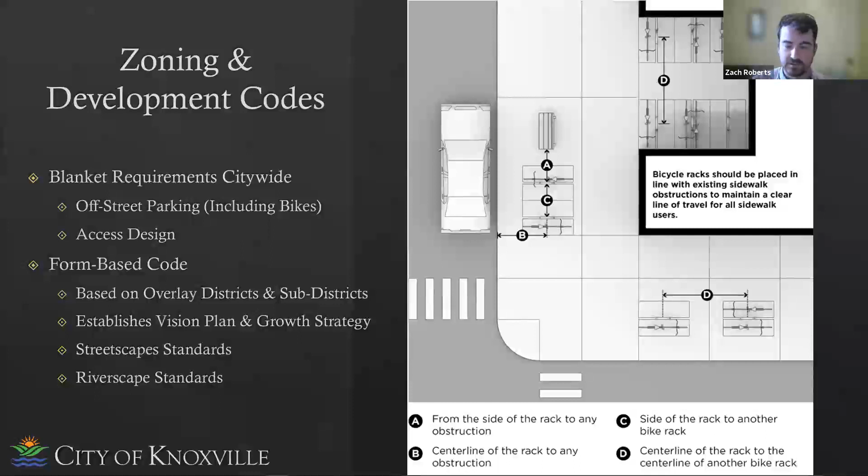The ATMS master plan is a living document that helps outline the broader vision for citywide ATMS investments. And it's the culmination of collaborative efforts and discussions between internal and external stakeholders, and provides a framework for these various parties and systems to work together in coordination for a complete smart transportation system.

The plan establishes an inventory of our existing communication corridors, and it also catalogs our future needs, provides standardization for various ITS elements and equipment, and it also prioritizes our future ATMS projects.

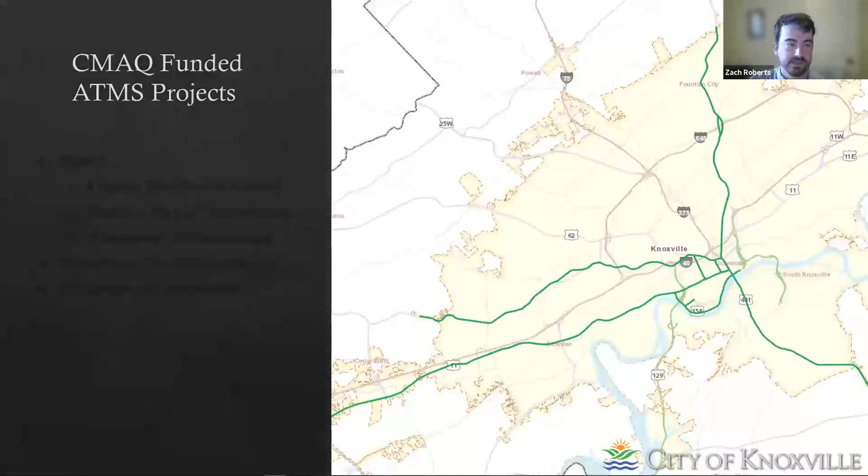The major corridors being addressed with the active ATMS projects will soon provide fiber optic communications between our traffic management center and 155 intersections along 4 major corridors, and then the area around downtown and UT campus. So phase 1, which is at 95+% design right now, will provide modernization and communications to 44 intersections along Kingston Pike, 17 intersections along Chapman Highway to the south, and 30 intersections heading out of town to the north on Broadway.

Middlebrook, which connects to our public works building where the traffic management center is, we'll do the same for 25 intersections. And then several corridors make up the UT area project, which includes 39 intersections.

And some of the elements of these projects: wherever possible, our ATMS projects will be using fiber optic communications, which will be connected back to that public works building at Morris Avenue, which is off of Middlebrook Pike. We are trying to move to above ground detection for better functioning and reliability. Our video detection of choice is Miovision cameras.

And connected vehicle infrastructure is a topic that's a bit up in the air right now due to the recent legislation, but all of our ATMS projects also include vehicle to infrastructure technology in their scope, and we're continuing to explore in partnership with the state various technology standards to determine which one is appropriate for the city of Knoxville.

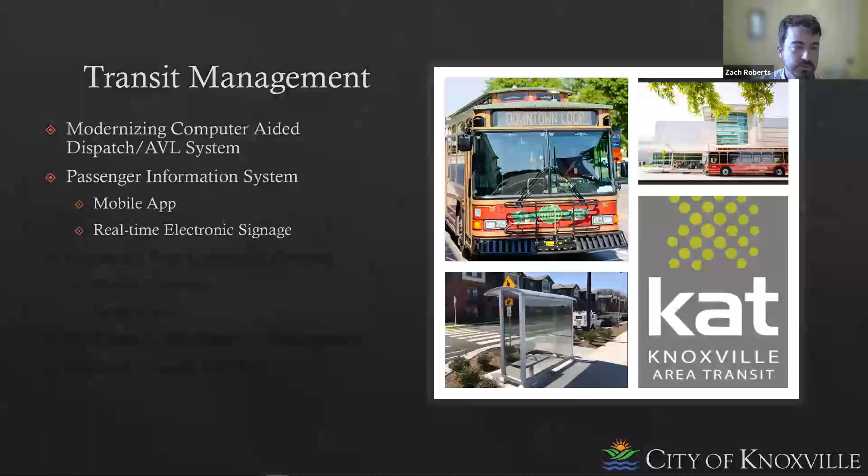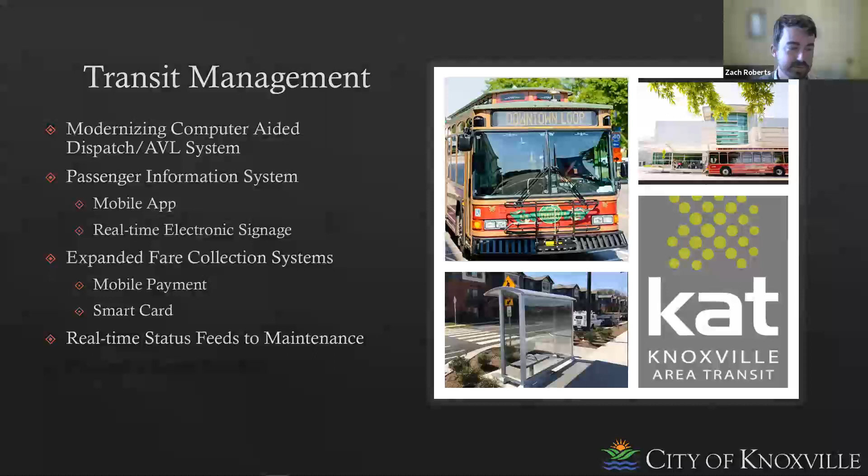modern passenger information systems, so they will be going to a mobile app, as well as real-time electronic signage, which will be in place at the downtown transit center, as well as at some of the more technology-equipped stops. They're expanding their fare collection system to include mobile payment and reloadable smart cards. And their vehicles will provide real-time maintenance information back to their maintenance center for better scheduling of that maintenance. They're in the procurement process right now. These improvements are scheduled to begin this fall.

One project that we're working on in coordination with KAT is an accelerated bus corridor along the Broadway corridor. North Broadway Route 22 is the highest ridership bus route in the city, and land use along the corridor provides a great opportunity for it to serve as a commuter route. KAT would like to further incentivize ridership with an added express service option. In conjunction with our active ATMS project that includes North Broadway, this corridor should have fiber optic communications along the entire extent by the time this project goes to construction.

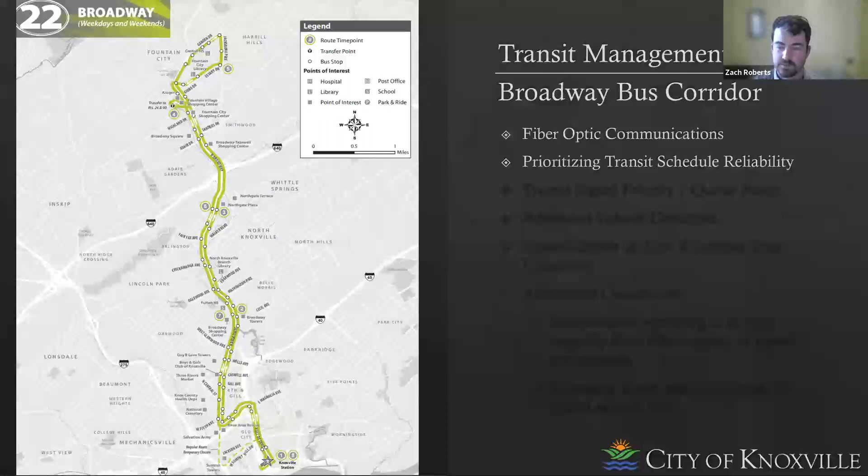The existing cross-section on North Broadway already uses the majority of the available right-of-way, so bus-exclusive facilities aren't a realistic option. That really restricts the amount of travel time improvement that's possible with this project. So this project aims to improve the transit experience primarily by reducing the headway of buses and improving schedule reliability for bus arrivals. To keep those buses on schedule, we're making use of the available space at some priority intersections to implement transit signal priority and queue jump lanes. And these are placed very strategically along the route.

Enhanced vehicle detection will also improve the performance of the corridor as a whole. And that will also be established partly in the Broadway ATMS project. Now, Route 22 has many heavy trip generation centers, but in the areas in between, a lot of existing stops are being evaluated for consolidation. So approximately a quarter of the stops may be consolidated to balance realistic walking distances to local stops with the overall corridor performance.

Some of the constraints this project has seen: intersections that are already operating at or near capacity limit the effectiveness of signal preemption in some locations. And then initially we were evaluating this as an express route overlay. So we would have the local route, the existing Route 22, with an express route on top of that. But the operating impacts of that just aren't justifiable with the ridership. So that's why we've gone to this consolidated single route option.

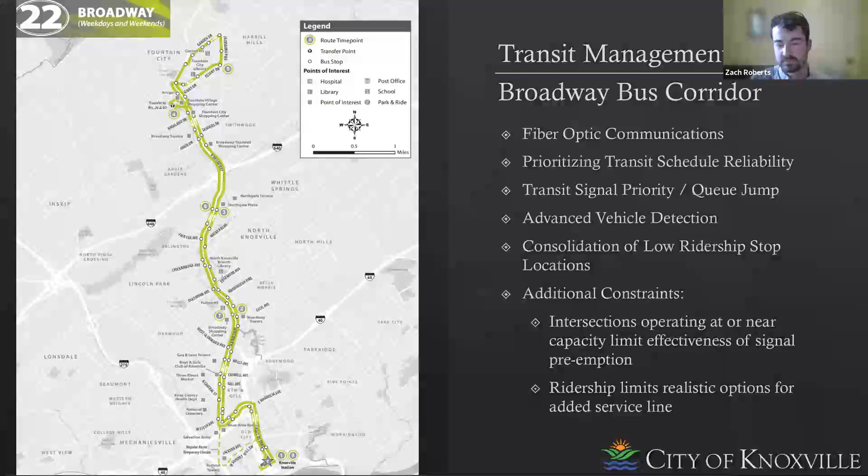Utility make-ready is a really stressful part of any ITS project. Our partnerships with utility pole owners are helping to give us a clearer path forward there. We have a blanket agreement with KUB that establishes a dedicated space for City of Knoxville communications at 42 inches below the neutral. And this applies citywide. So at some point in the future, theoretically, the city will have a reserved space on most of the poles for future deployments of fiber or other communications.

In the meantime, this agreement doesn't immediately resolve existing conflicts. So a project-specific agreement was reached between the city and KUB to allow the city to share the SCADA space with KUB. This reduces the need for relocation within our ATMS utility make-ready. But due to regulations on who can perform work in the high voltage space at and above 30 inches, this agreement stipulates that KUB is the one managing the city fiber in this space.

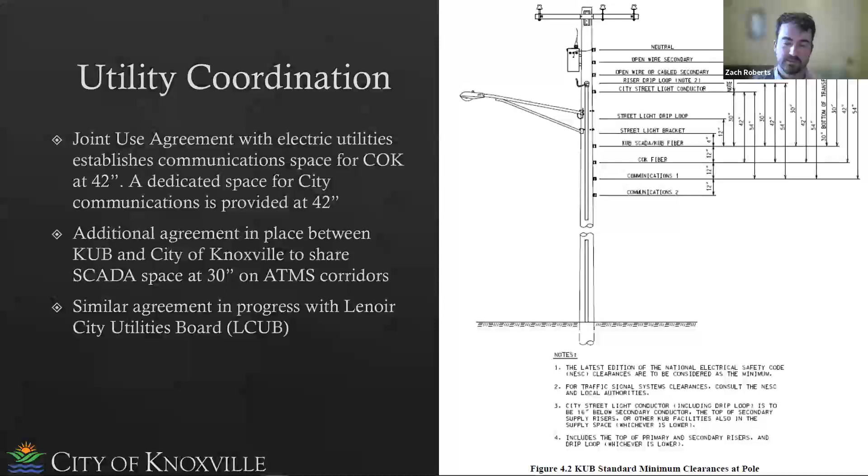And these agreements are already in place with KUB, but we have a similar agreement in progress with LCUB. Those are our two major electrical utility providers in Knoxville. By establishing these standards, the city only needs to worry about utility make-ready on third-party owned poles. So that drastically cuts back the utility make-ready burden placed on our ATMS projects.

Evan is heavily involved with our signal operations teams, so I'll let him discuss some of the things that we're doing in that regard. Thanks, Zach, and thank you to TSITE for the opportunity today to present. I know Jeff, Zach, and I are glad to present these advanced traffic management and operational efforts on behalf of our city. So I'm going to go over some of our safety standards that we've implemented in our signal shop and some of the modernization efforts for equipment around our city.

So starting off, our signal shop has prepared standard operating procedures in our city to really protect our people, boots on the ground, with a safe working environment, with best practices in the field through this SOP. This SOP ensures compliance with OSHA, TOSHA, NEC, IMSA, NEMA, and other engineering standards.

Another way that we keep up with these safety standards is scheduled training for our individuals in the field. They keep up with their IMSA certifications, and we recently had all of our technicians take arc flash training so that they're able to operate in the cabinet with high voltage electricity. So that way they can stay cutting edge in what they do and stay safe out in the field.

Some of the other safety standards that we've implemented through our cabinet infrastructure or various arc flash items is we've placed arc flash stickers on every cabinet in the city. And as I said, all of our technicians are certified for arc flash inside of the cabinet. Some cabinet components we've worked on is changing load resistors to load capacitors to reduce heat in the cabinet. This also allows for easier individual maintenance, and they can swap without putting the signal in flash.

So you have less possibility for accidents while the intersection's on flash. You don't have individuals in the intersection trying to direct traffic or anything like that. So also on that note, surge suppression change-outs for easier individual maintenance on the back panel. And something big of note that Philip Reyes and his team did was change mercury contactors in our cabinets to solid state contactors. It was a very time-intensive process, but that essentially provides better environmental safety at all of our cabinet locations in the city.

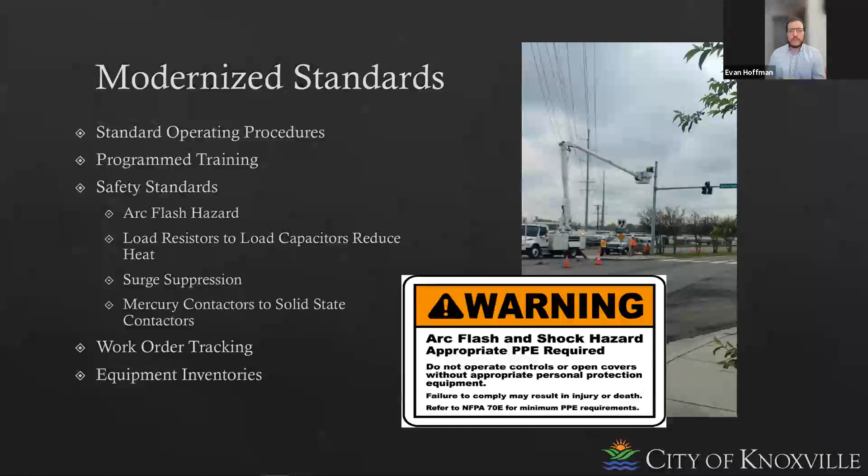Next slide, Zach. Modern procurement. So Zach kind of touched on this a bit, but we certainly have involvement with different areas throughout the city and with KAT as well on evaluation of these different technologies in our city. So our information systems department, making sure they're involved so that they know what is on the backbone of our city. And we always have to include our purchasing department for procurement of all of these technologies as well.

So in evaluating these technologies, we have to make sure our ATC components, like our controllers, our conflict monitors, and our ongoing central ATMS software, are all compatible together as well, that they all mesh together. And around 2 years ago, we did a video detection request for proposal in obtaining overhead detection that's capable of data collection in the future.

So we went through a demo in the street with several vendors and selected 2 vendors that we have contracts with so that we can install data collection video detection as needed and when we're provided enough money in our budget. So that's another improvement. And school zone flashers, I'll touch on this in a later slide, but we've certainly improved that portion of our system as well. In 2015, our team revised the TDOT 730 spec for traffic signals to more closely align with some of the things that our signal shop does in the street and the kind of equipment that they like to use for easier maintenance.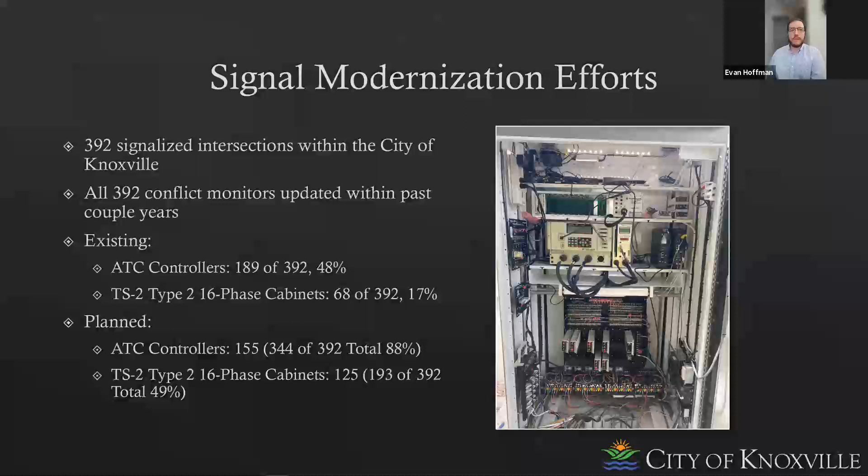So one benefit to these cameras along this corridor is we could view game day situations, see how we could possibly improve along that corridor, but also class change times can become very hectic in the area. So we have 14 intersections capable of obtaining volume counts. We're hoping to vastly increase that with our ATMS projects. Again, these provide live video feeds, and we'd like to implement automated traffic signal performance measures in the future at these intersections. We also have GridSmart in our city at 4 intersections, and they also do some research on Bluetooth device travel time throughout our city.

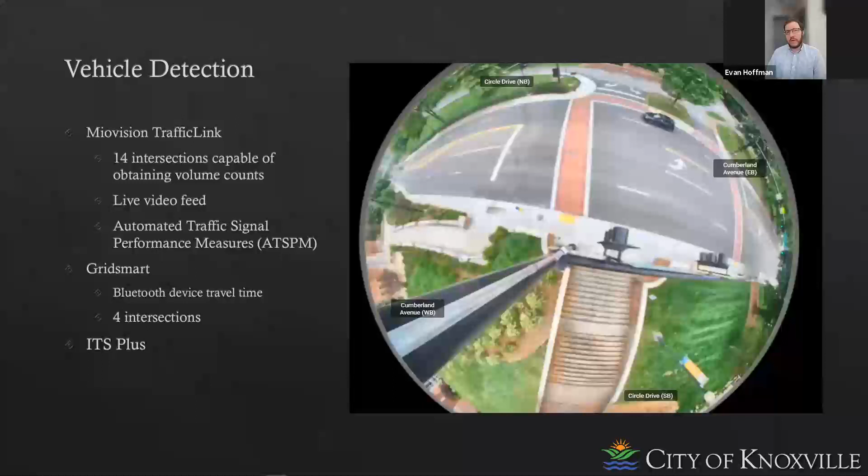And our other vendor for video detection is ITS Plus. We can collect data through their platform, but we have to do it at the cabinet. So we prefer MioVision in this sense, but ITS Plus is a great secondary option for us as well. Some of our other efforts as far as communications: we've upgraded 99 intersections with high-speed wireless radios and around 50 intersections with fiber optics. One thing our team does really well is bridging the gap between some of these different communications, such as radios and fiber optics. And sometimes a lot of those intersections, we don't even have those. So our team does a great job in figuring out how to bridge those gaps as far as communications.

Accessible pedestrian signals. We've upgraded around 35 intersections with APS as part of capital improvement projects around the city. So that has been a great improvement towards walkability for pedestrians in our city. And our school flasher system, to highlight that, we have 164 school flashers in our city limits. Our old school flasher system, we didn't have the capability of remoting in scheduling changes for these schools or obtaining maintenance alerts to repair a bulb or if something else is wrong at the school flasher. So it was a very time-intensive process each year to touch base with these schools, go out to each cabinet and change all of the times that they need to be. But now it's just a simple email or a request that we can go in and change and remote those online. So that has been a wonderful upgrade for our team.

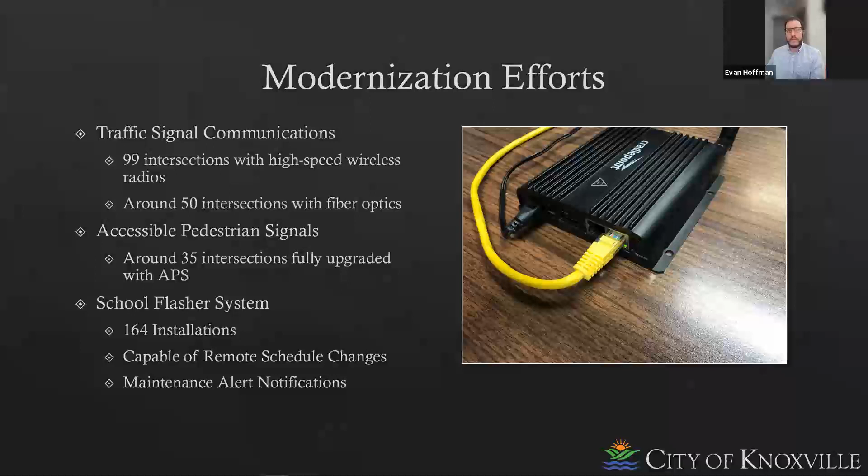Open data is a priority for the city, and that includes providing valuable data to the public, as well as leveraging potential sources of data to improve our own operations. One way we're providing data to the public is through our automated road closures feed. Every permitted closure inside the city is geo-referenced and stored on the KGIS SDE. And from there, it's displayed on a map program on the city website, and a JSON feed is produced from the GIS feature class, which is output to Waze through their Connected Citizens program. Currently, that's the only mapping provider that utilizes the feed, but the city is open to providing the data in other schemas to other partnership programs if they become available to us. And our Emergency Operations Center is currently looking to add features for emergency closures like flooding.

Waze Connected Citizens program also gives us access to data sets for traffic operations data, such as travel time and incident reporting. Corridors can be established to evaluate A/B route-based travel times, and vehicle speeds are cross-referenced against historical data to determine when backups occur. And these alerts are available through a web portal or email notifications. The Waze API provides more in-depth tools as well, which we are excited to explore in the future.

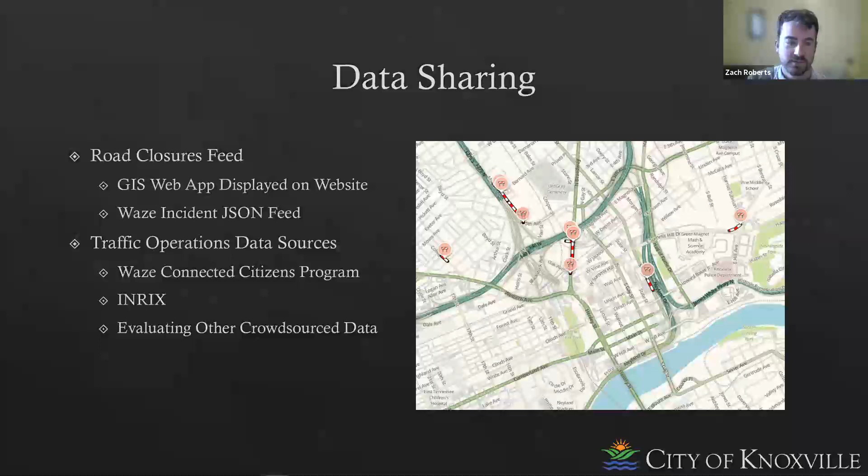We've also got access to the INRIX data through the partnership with TDOT, and we're evaluating for some of our other projects some other crowdsourced data, such as the StreetLight data and Wejo connected vehicle data that's collected from the OEMs. And we'll talk about a few of our site-specific ITS projects that we've implemented in the past few years.

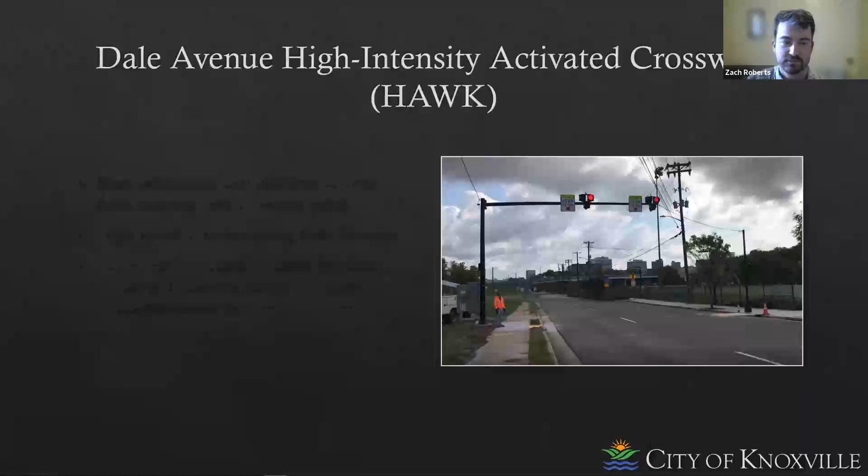Evan, you can take this one. I'll briefly touch on this one, and then I'll pass it back to Zach on some of our passive detection for vulnerable users around the city.

But this was one project we did last year where we were trying to come up with a solution along Dale Avenue. It's just off of I-40 near the downtown Knoxville area with the University of Tennessee campus just to the south. But the scenario here is just to the right of that picture, there are a lot of soccer fields where you have a high amount of pedestrians with parking lots on the north side of the road. So you had these pedestrians with a lot of children crossing the street here with vehicles traveling 40, 45 miles an hour at times.

And we're trying to find a way to get vehicles to yield to these pedestrians so we didn't have someone possibly hit or killed. So we identified a high intensity activated crosswalk, also known as a HAWK signal. I can't think of any that I know in our immediate area, but I have heard of a few in the state. So we identified this as a good location for the first install in Knoxville. It's a one-way street, so we only had to install this in one direction.

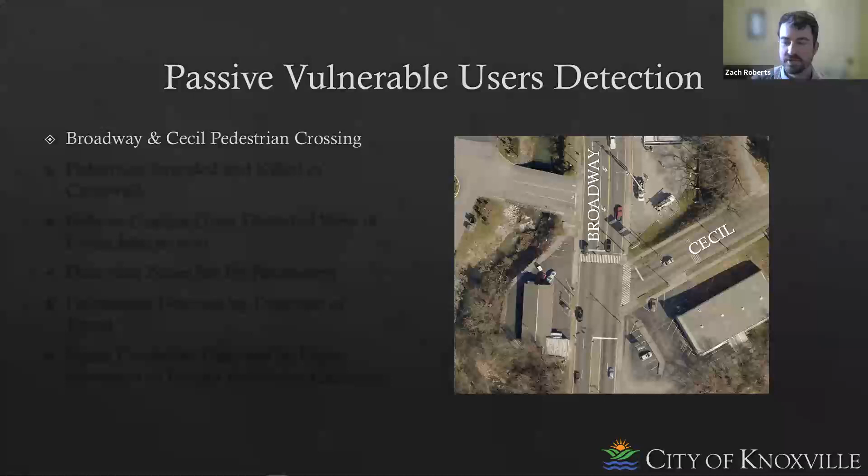Okay, Evan mentioned that we're prioritizing passive vulnerable user detection as well. So this location at the intersection of Broadway and Cecil, Broadway is a 5-lane arterial with an ADT in this area of approximately 30,000 vehicles per day. And right-of-way constraints really restrict our ability to install pedestrian signal infrastructure here. There is a signal head, but there's no room for push-button poles.

Several years ago, a mother and her child were attempting to cross Broadway eastbound. As they were halfway across the intersection, the phase changed and a vehicle in the rightmost lane accelerated very quickly. The driver didn't see the pedestrians and the mother was struck and killed. So we saw this as an opportunity to try to implement something that we hadn't done before.

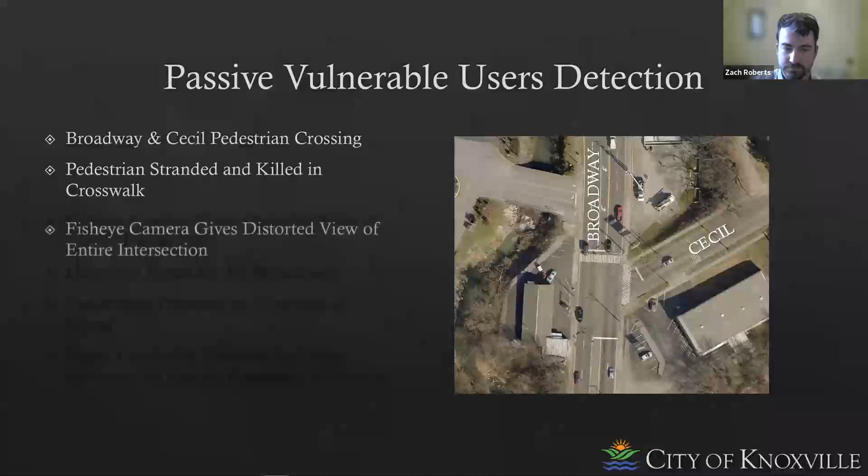The intersection is semi-actuated with induction loops on Cecil Avenue, but we installed a GridSmart fisheye camera specifically for pedestrian detection. And this allows us to establish detection zones wherever we need within the view of the camera. So first we placed detection zones at both corners of the Broadway crossing to input pedestrian calls for service. Since installation of pedestrian poles adhering to ADA standards isn't possible due to site conditions, this allows the pedestrians to get service without having to wait for a vehicle to pull up on the side street or to cross against the signal. The GridSmart camera also allowed us to set detection zones within the intersection.

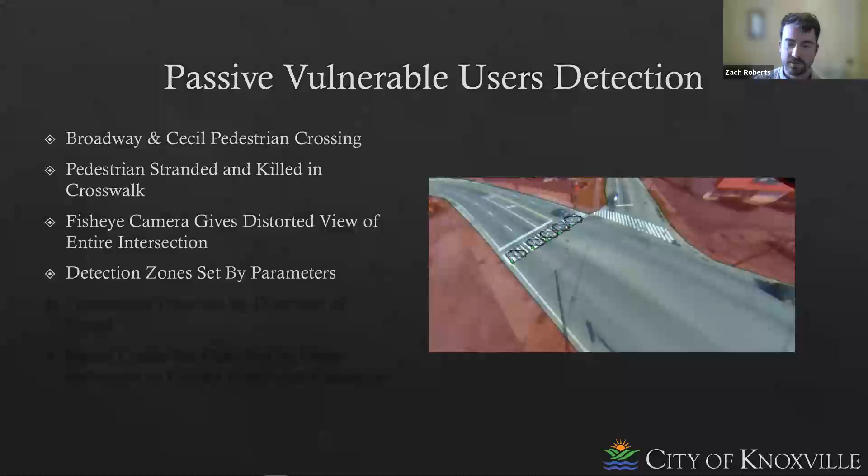The camera allows us to set detection parameters, so not every user within a detection zone places a call to the controller, only if it meets certain criteria. And these in-crosswalk detection zones pick up pedestrians based on movement perpendicular to Broadway, so anything moving parallel to Broadway is ignored. So that distinguishes pedestrians from vehicles that are just pulled up past the stop bar, like you can see in this photo.

The controller used at this intersection is programmed with logic statements that can tell the signal at certain points in the cycle when a pedestrian is detected in the crosswalk, a green extension is given to the side street phase. So if a pedestrian gets stranded as the phase is changing, the signal can recognize this and extend the green up to a certain point.

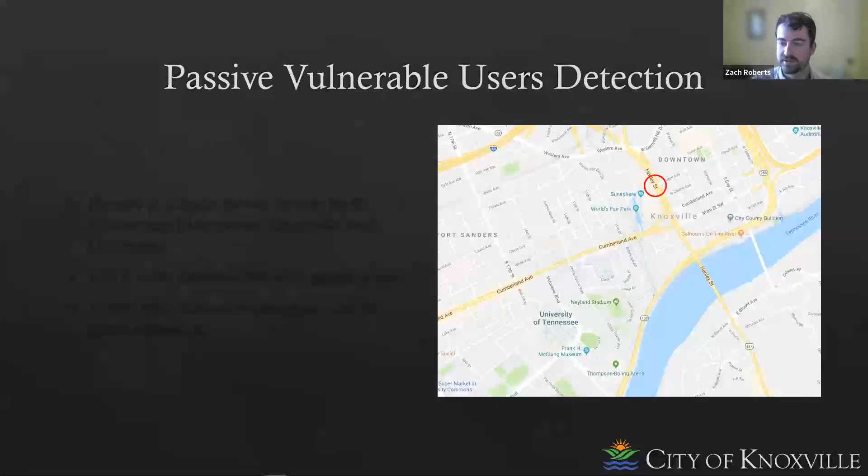Another area where we're doing something similar is downtown at the intersection of Henley and Clinch. Henley Street is a divided arterial, 6, 7, or 8 lanes, that cuts through downtown. It's a significant barrier for cyclists, with most crossings occurring at this one intersection, since the other intersections aren't really bicycle appropriate.

Downtown is to the east, and the UT campus and surrounding areas are to the west. Henley carries approximately 38,000 cars per day. It connects both major interstates to the north, as well as several other arterials, to South Knoxville across the Henley Street Bridge and onto the Seymour and Sevierville area. So it's a really major corridor for cars.

The bicycle traffic varies year to year, but it typically serves about 100 bicycles a day. This intersection also serves 1,000 to 2,000 pedestrians per day, but a pedestrian bridge across Henley really alleviates the pressure from that foot traffic.

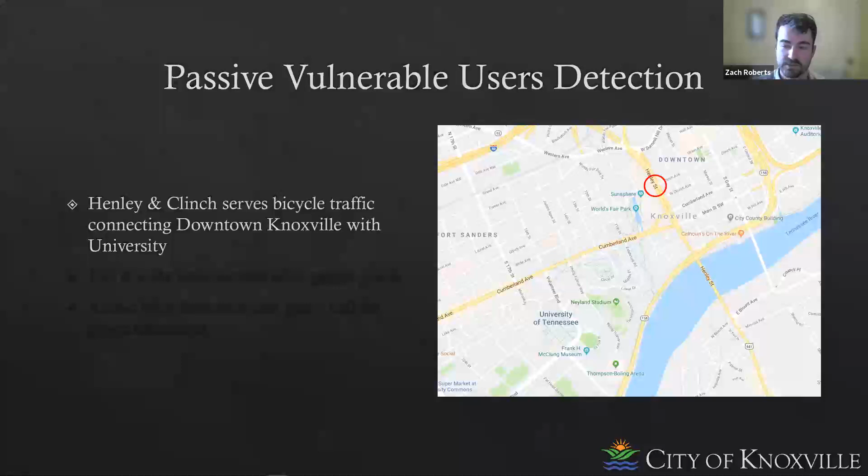Clinch Avenue is split phased, and the eastbound approach has a pretty low vehicle volume. This approach is slightly upgrade, so crossing the 150-foot wide intersection can be pretty intimidating for a casual cyclist. Because the vehicle volume is relatively low, the split times for this approach are kind of short, and the phase will also gap out pretty quickly.

An avid cyclist can make it across the intersection pretty easily, but as you can see, it can be pretty intimidating to cross quickly for many. And it's not a safe situation to have cyclists stranded when 7 lanes of traffic on Henley are released.

So again, we have inductive loop detection here for cars, but using Miovision detection that can identify and classify vehicles as bikes, as well as similar logic statements in our ATC controller, we're able to see when a cyclist is still in the intersection during the side street phase and request a green extension. We are experiencing some issues with this, but when it works, it's able to keep bicycles from being stranded in this dangerous intersection.